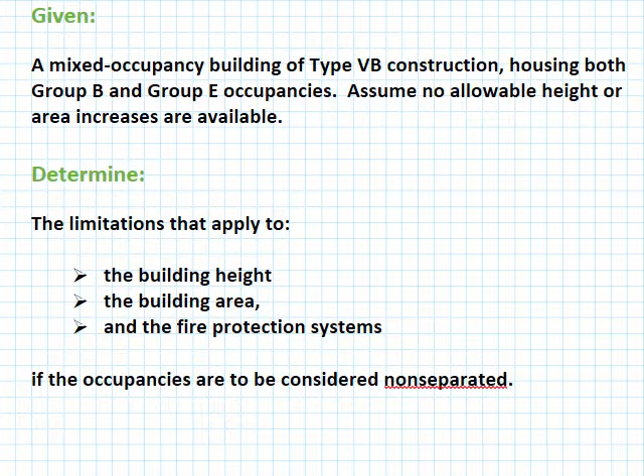So what is a non-separated occupancy? Non-separated occupancies are detailed in section 508.3. This section basically states that each portion of the building has to meet the code requirements based on the occupancy classification of the space. Furthermore, the most restrictive provisions of Chapter 9 that apply to the non-separated occupancies shall apply to the total non-separated occupancy area.

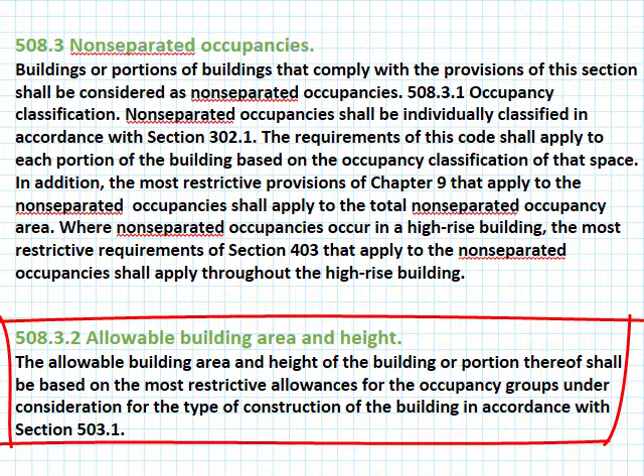If you go down to subsection 508.3.2, it details the maximum allowable building area and height. It states that the allowable building area and height of the building or portion thereof shall be based on the most restrictive allowances for the occupancy groups under consideration for the type of construction of the building, in accordance with section 503.1.

Section 503.1 refers the user to table 504.4 for the maximum allowable number of stories, and to table 506.2 for the maximum allowable area factor. The maximum allowable area factor is basically the maximum area for each story of a building.

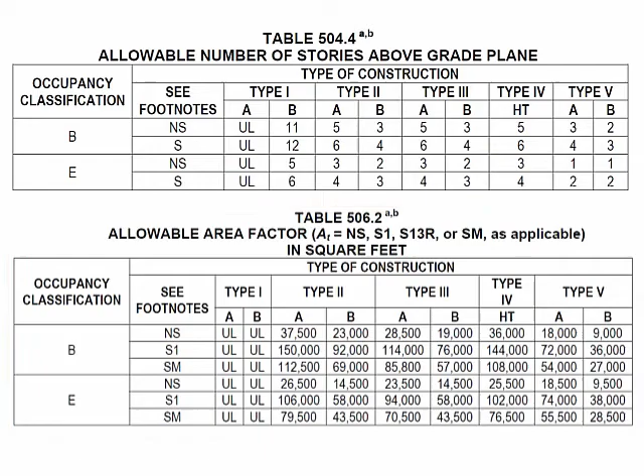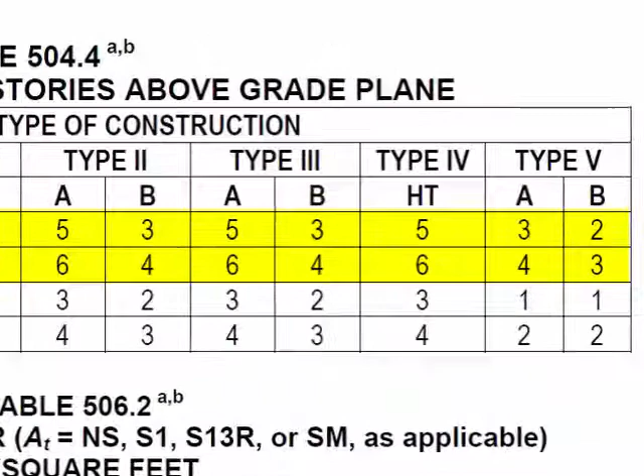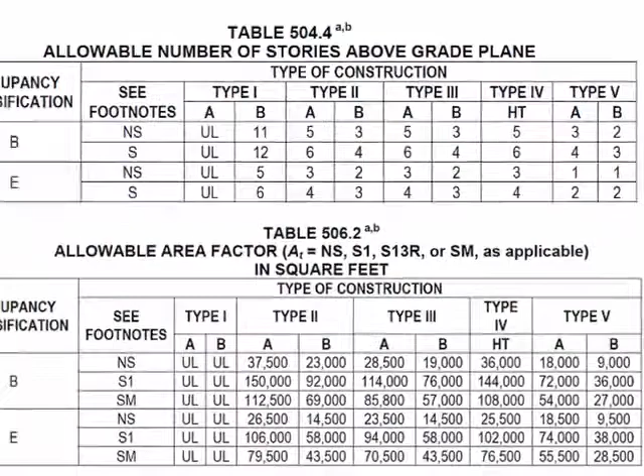So I cut and pasted the rows for Groups B and E occupancies from each of the two tables. If you go over to type 5B construction, the maximum number of stories for an occupancy classification B building for business is 2 stories. The maximum stories for an E occupancy is 1 story for a non-sprinkler building. We're using non-sprinkler buildings because the problem statement specified that no height or area increases were to be assumed. A sprinkler building, as you can see, permits 1 additional story above grade plane.

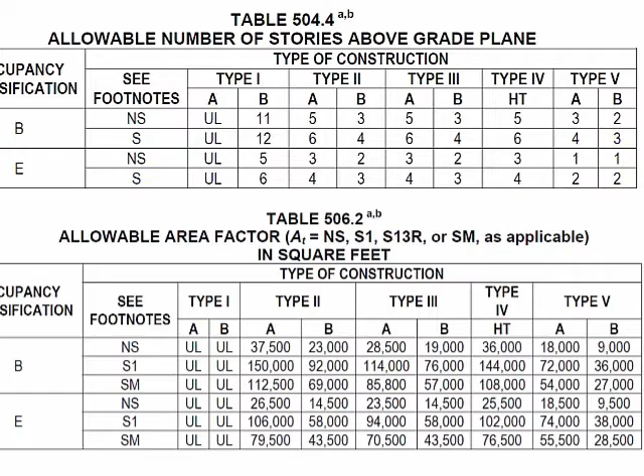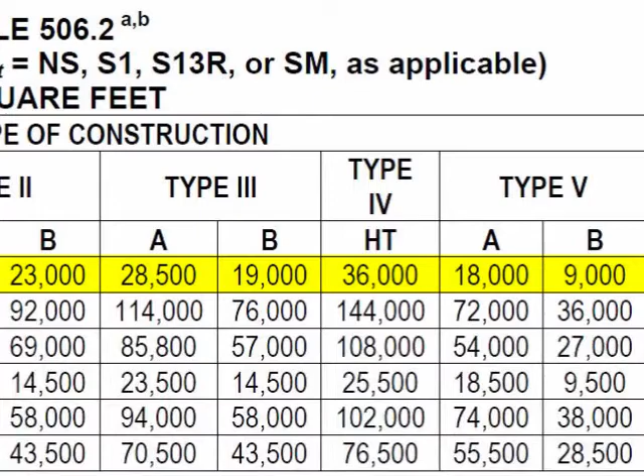If you go down to table 506.2 for the occupancy classification of B and a non-sprinkler building of type 5B construction, the maximum area per story is 9,000 square feet. For a Group E building, the maximum area is 9,500 square feet.

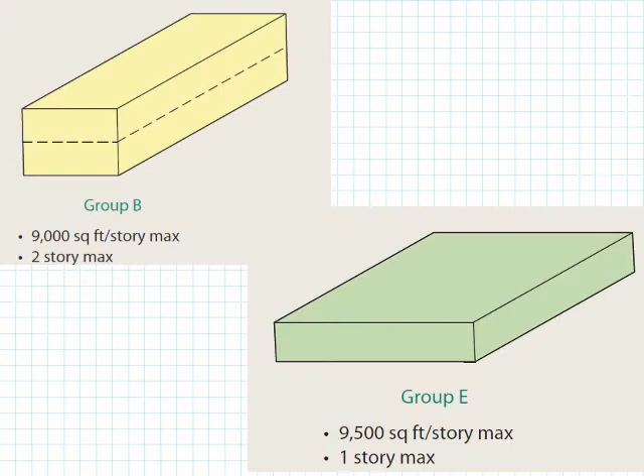By taking the most restrictive requirements for each of Group B and E, we can see that 9,000 square feet per story is the maximum area based on the Group B occupancy, and that a 1-story maximum height based on the Group E occupancy is the maximum permitted for the non-separated occupancy building.

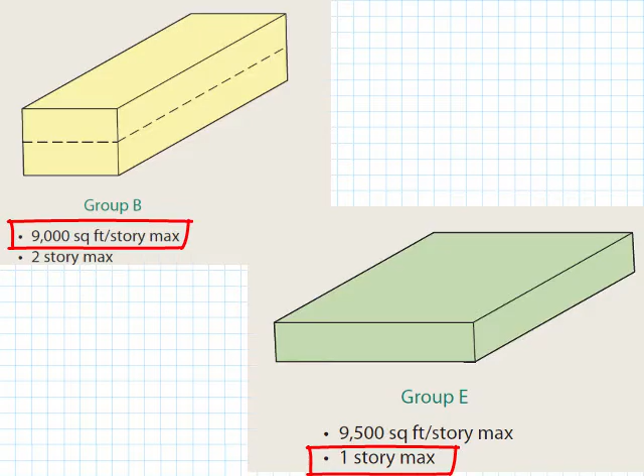Section 508.3 refers the user to Chapter 9, which deals with fire protection systems. It requires that you take the most restrictive requirements for any portion of the building and apply it to the entire building. So the only portion applicable in Chapter 9 is in Section 907, dealing with fire alarm and detection systems. Section 907.2 goes into detail about where such systems are required in new buildings.

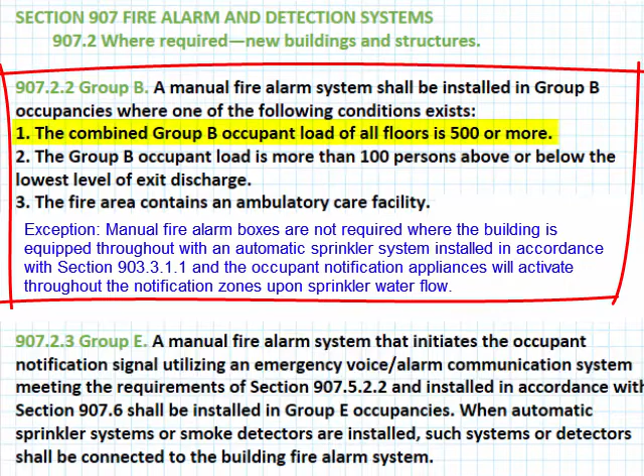So in subsection 907.2.2 for Group B buildings, it specifies that a manual fire alarm system shall be installed in Group B occupancies where one of the following conditions exists. The first condition says the combined Group B occupant load for all floors is 500 or more.

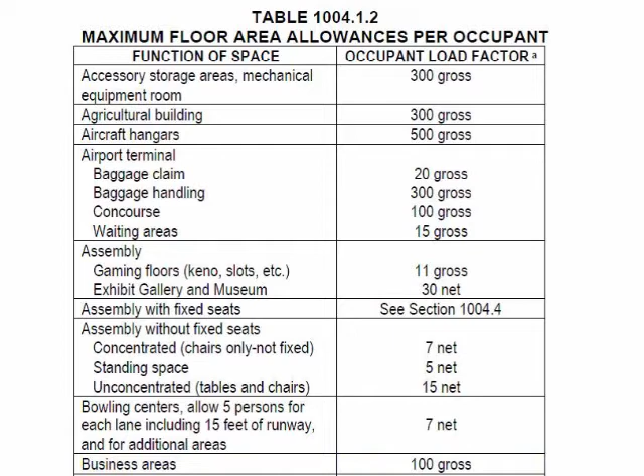If you go to table 1004.1.2, it specifies the maximum floor area allowance per occupant, and it gives an occupant load factor of about 100 gross square feet per occupant. So that translates in a 9,000 square foot building into about 90 persons.

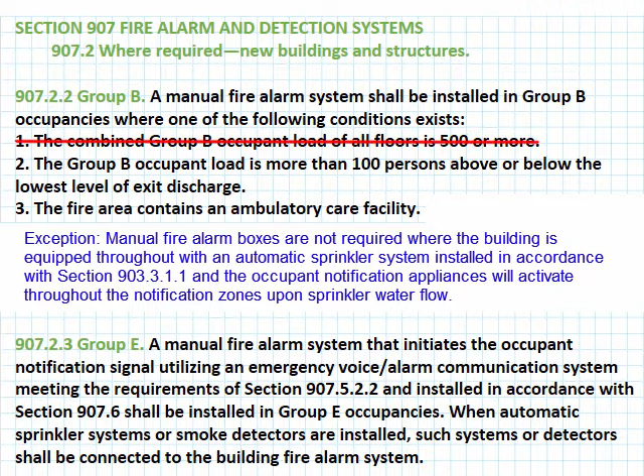So number 1, an occupant load of 500 or more is not applicable. And since we only have 1 story, number 2, which specifies that a Group B occupant load is more than 100 persons above or below the lowest level of exit discharge, is also not applicable. Number 3 deals with ambulatory care facilities, which are often classified as Group B occupancies, and that's not applicable either.

So if you go down to subsection 907.2.3, it gives the requirements for new Group E occupancies, and it specifies that a manual fire alarm system is required, which initiates the occupant notification signal utilizing an emergency voice alarm communication system.

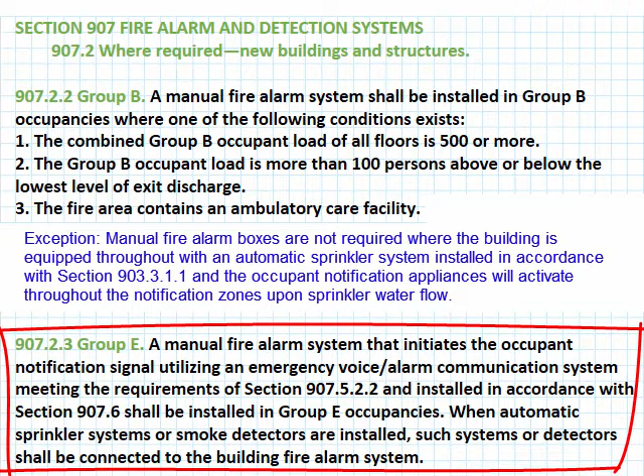So the solution to the problem takes the more restrictive requirements for the height, the area, and the requirements in Chapter 9. Based on the Group B and the Group E requirements, the maximum area is 9,000 square feet per floor. The maximum number of stories is 1 story max, and the entire building requires a manual fire alarm system.